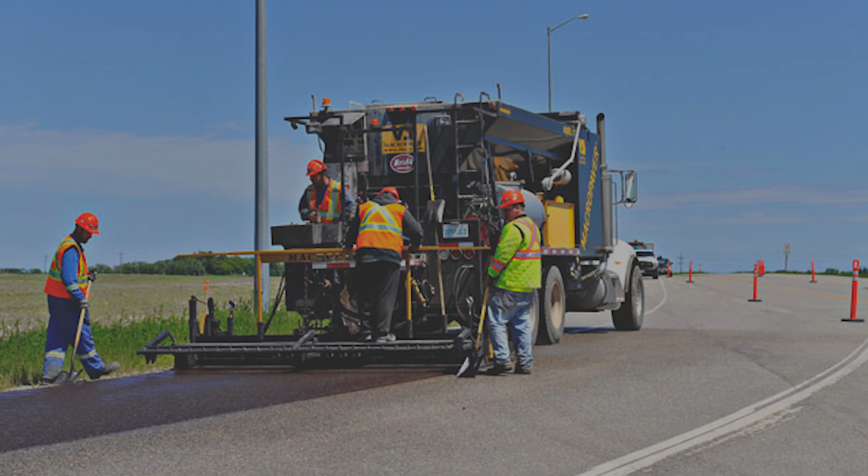A Sunday drive on a scenic highway, a rush hour on the way to work. Bridging gaps between communities and commerce has been the primary focus of roads in our day-to-day lives. What happens when the integrity of our roads begins to crack and crumble due to high-volume use, severe weather conditions, or simple lack of care?

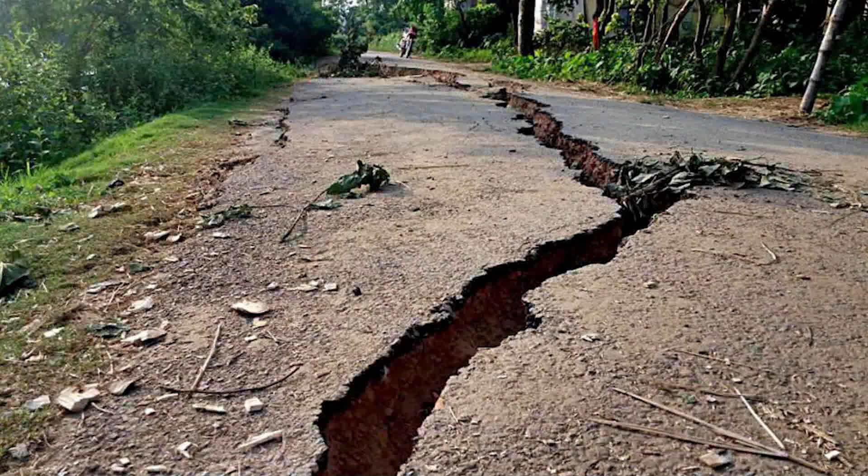It's important that long-term investments are nurtured to maintain the original state they were intended for. A quality solution for others to travel on that is safely engineered and preserved by professionals and the equipment they choose to use. Over time, a road surface becomes brittle and fragile, causing cracking, loss of friction, voids in roads, and ultimately hazardous conditions for drivers and their passengers.

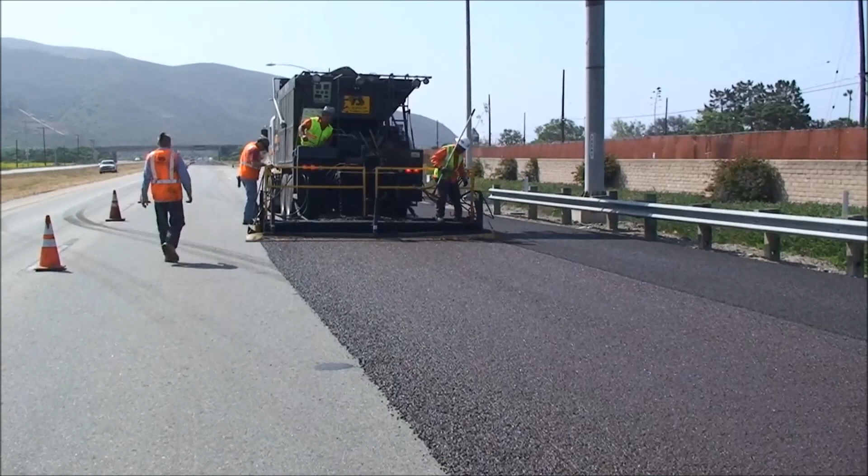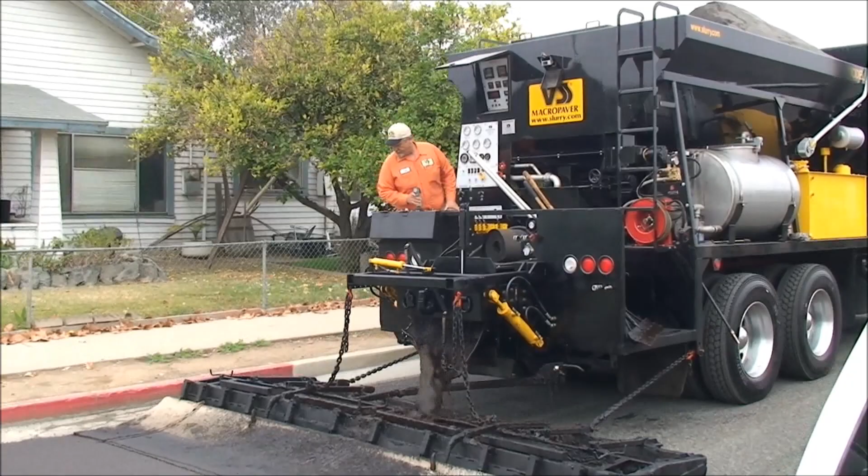Fortunately, there are solutions that are paving the way for construction specialists to identify weaknesses in roads and effectively solve problems through prevention before any heavy rehabilitation is required. It's important to choose the right solution for the right road. SLURRY and microsurfacing are top-quality, durable solutions available in road maintenance and preservation.

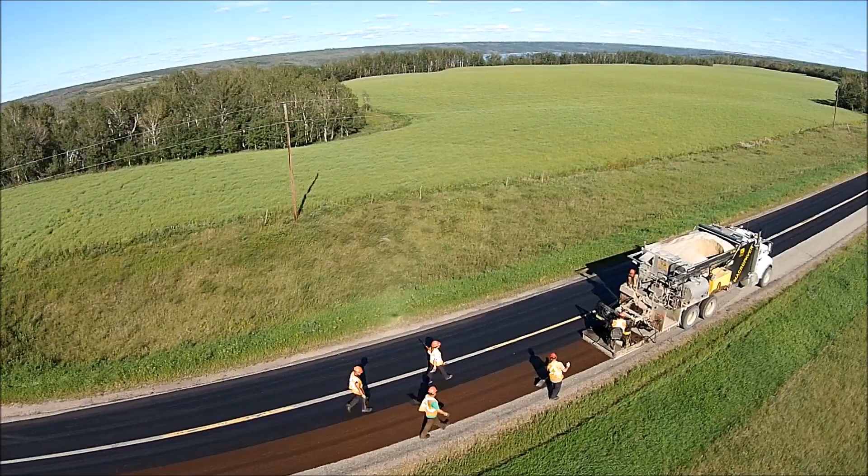Although SLURRY does not solve all issues that plague the roads we drive on, it is the most effective form of road maintenance. This prevents the financial consequence of doing too little to repair it or waiting too long to maintain it. So what is SLURRY? SLURRY is a combination of emulsified asphalt, fine aggregates, water, and additives that are precisely mixed together to spread over a prepared surface. With the capability to be applied in multiple layers, SLURRY can lengthen the life of existing pavement by providing a protective guard against oxidation, water and sun damage, and freezing temperatures.

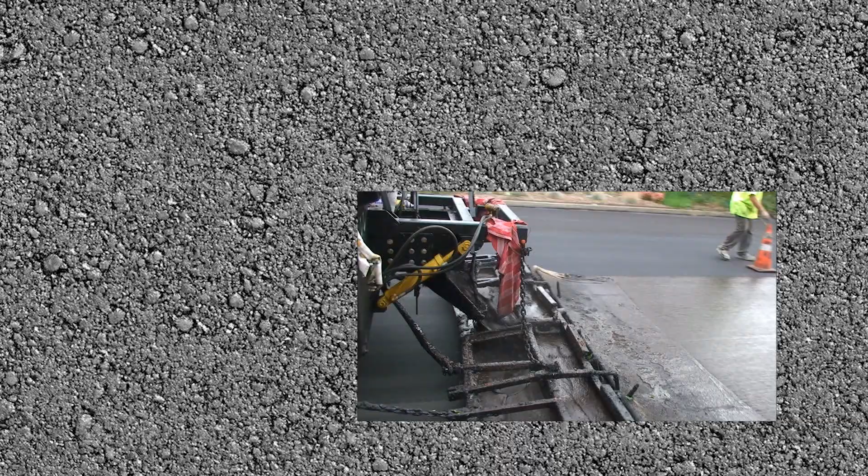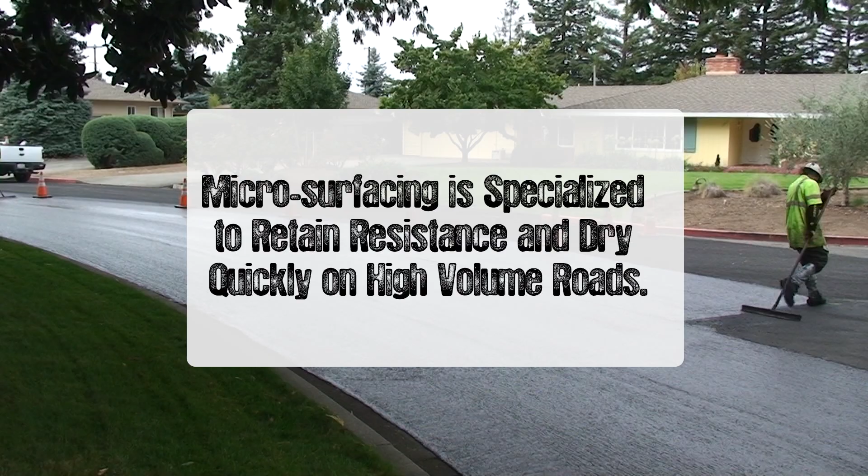What's the difference between SLURRY and microsurfacing? Microsurfacing is a specialized version of SLURRY. It is designed to retain skid resistance while prolonging the life of the road just as SLURRY is. Microsurfacing uses a polymer-modified emulsified asphalt, water, and additives with a faster setting time due to the chemical makeup. It is applied in thicker layers for high-volume roadways that need to dry quickly.

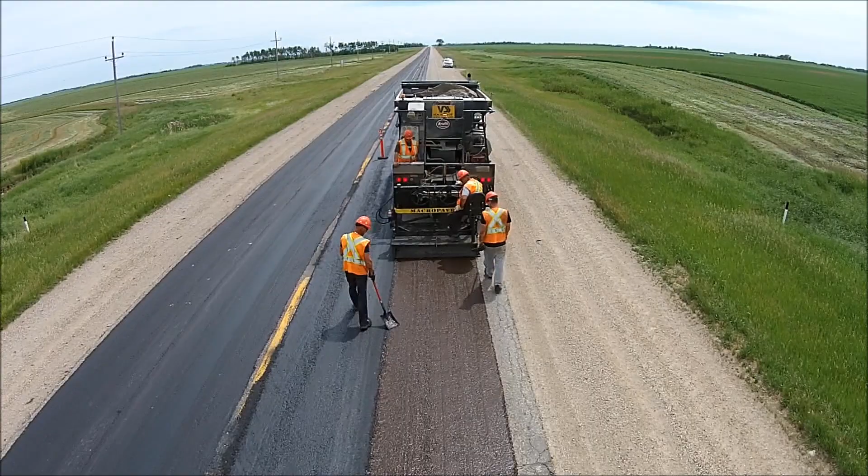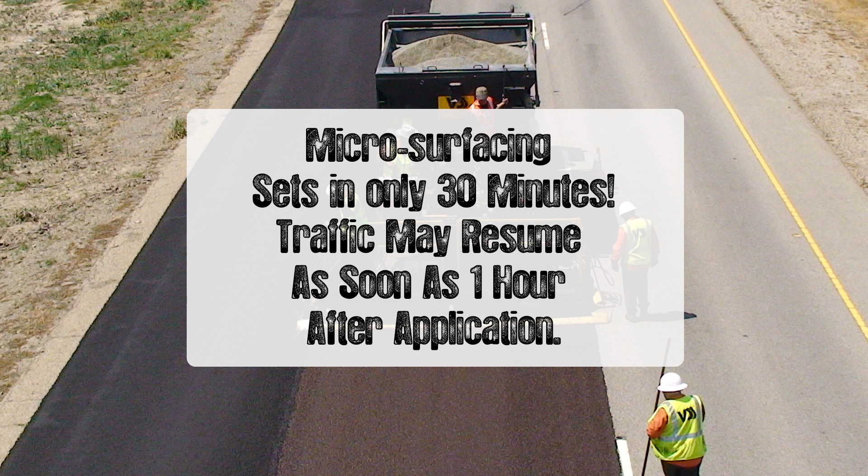Remarkably, microsurfacing can dry in 30 minutes, compared to a 2 to 5 hour set time for SLURRY. This ensures that traffic interruption is kept to a minimum, or can be done overnight. Cars can begin to drive on the surface 1 hour after it's been applied. It's that fast of a product.

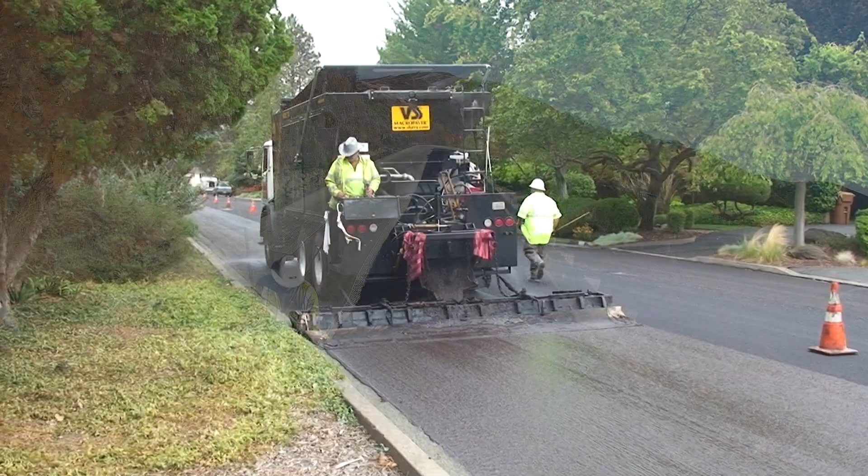It's important that SLURRY is applied to prepared surfaces. Roads showing the signs of damage need to be clear of imperfections that can affect the outcome of the quality of the project. Microsurfacing and SLURRY are applied to roads that are in good structural condition and have had failed areas repaired, cracks sealed, and roads swept of any debris that could prohibit the emulsion from sticking to the road.

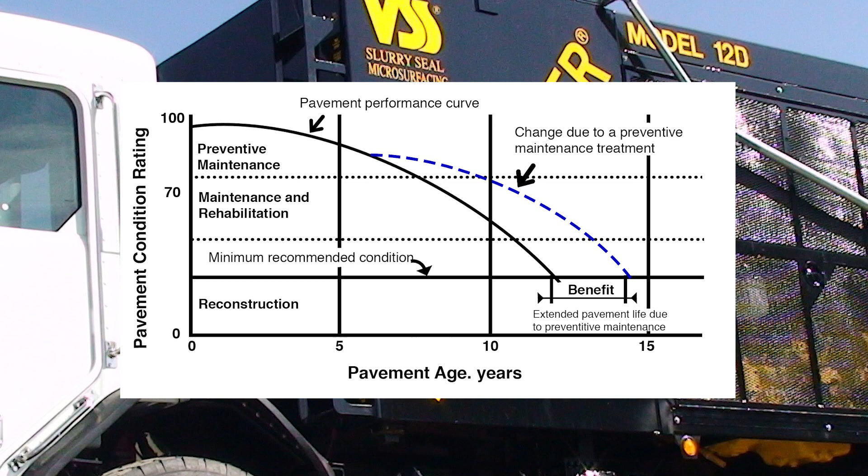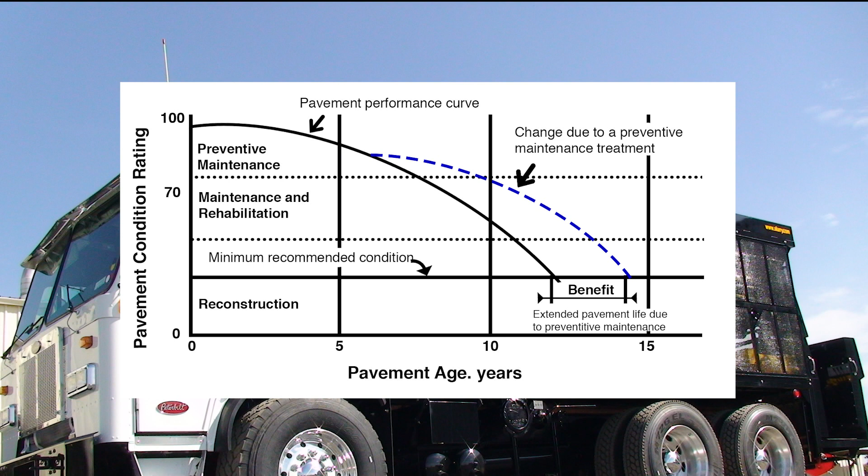SLURRY and microsurfacing benefits are clear. They are unique in their abilities to restore quality to old surfaces, prolong resistance to wear and tear, and increase overall friction on the roadways. This translates to longer-lasting investments and high-quality, safe roads with increased pavement performance.

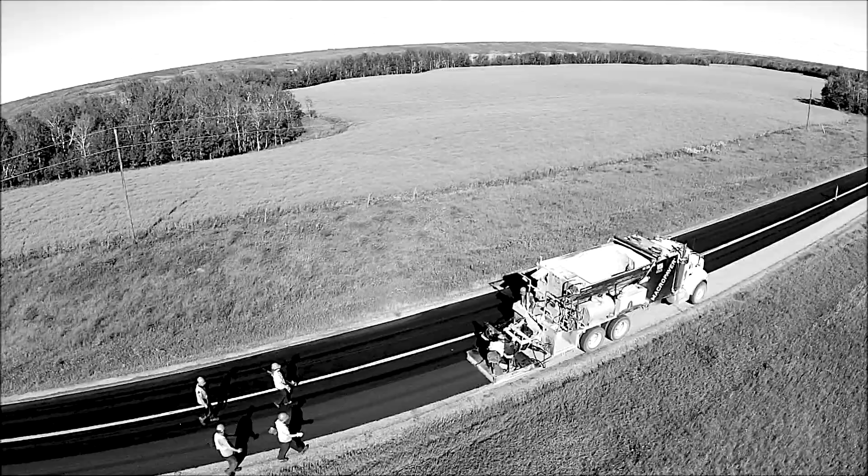Valley Slurry Seal Macropaver Division is an expert in the field of pavement maintenance. Whether it's equipment designing and development, technology and advancement, or training on equipment purchases, VSS Macropaver is a leader in the industry. Collectively combining forces with leading asphalt and emulsion technologies, VSS Macropaver is the single solution for all pavement maintenance and equipment solutions, specializing in SLURRY and microsurfacing needs.

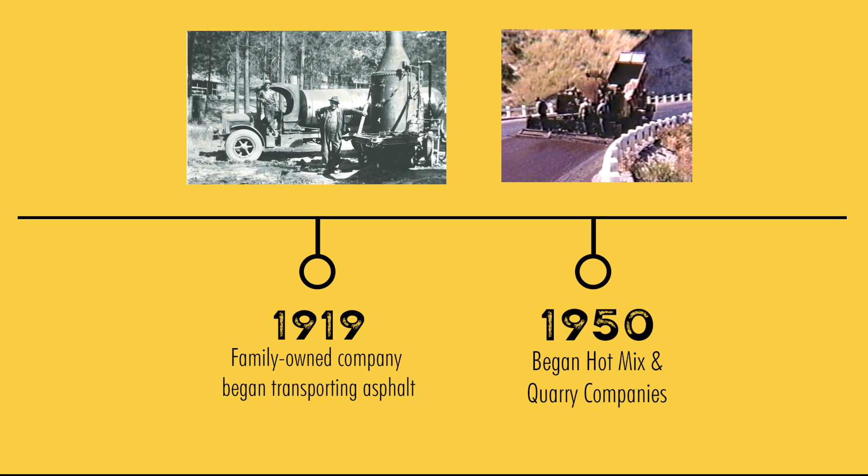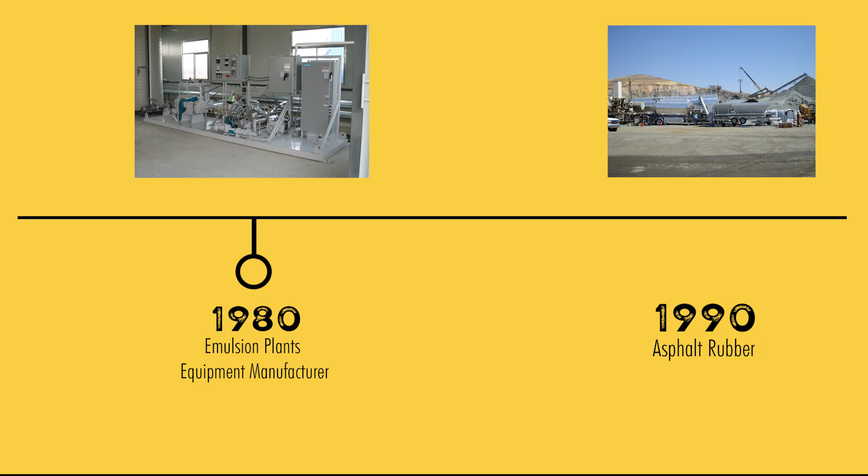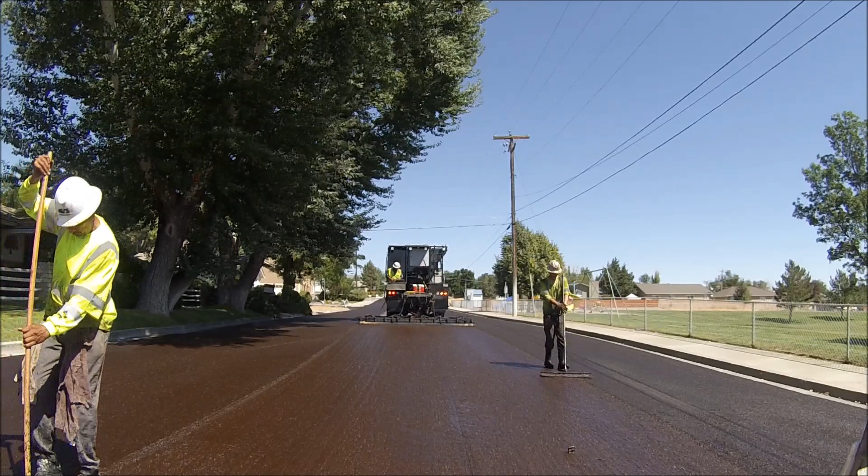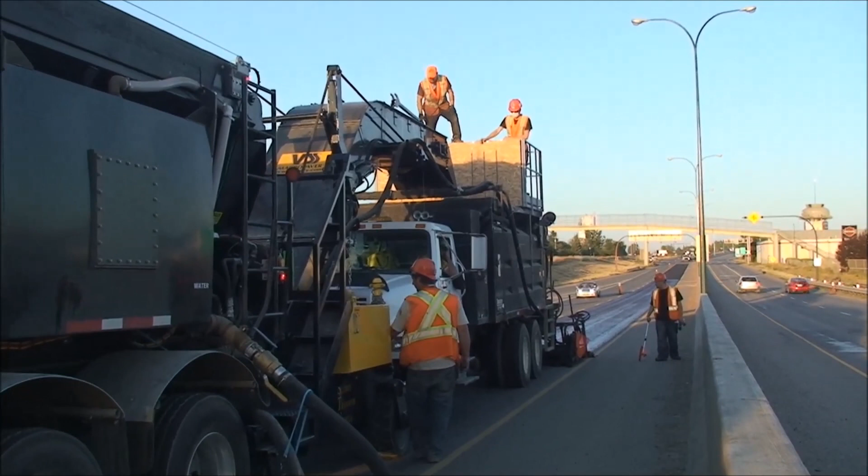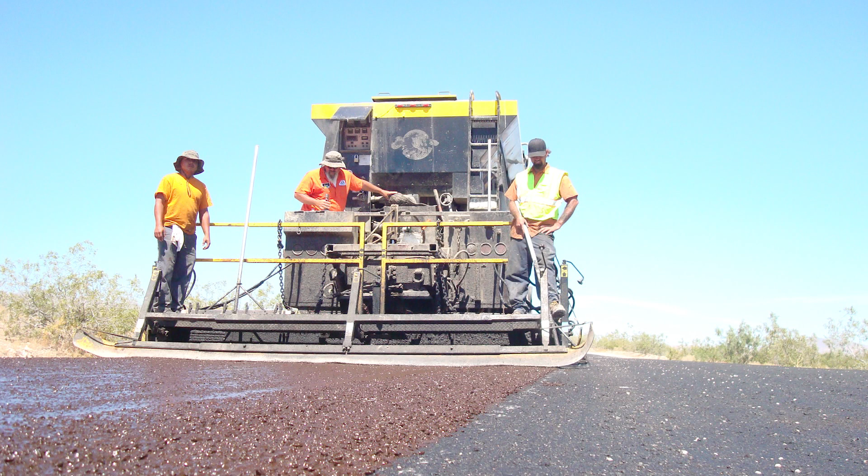From a construction standpoint, VSS had difficulty finding equipment that satisfied its need for quality, durable, superior equipment in road maintenance. Thus, the Equipment Manufacturing Division was implemented as a solution. Then the Macropaver Division, now VSS Macropaver, was conceived and has become an international asphalt maintenance equipment provider. VSS Macropaver takes pride in the moments that have built our business and have encouraged our vision for the future.

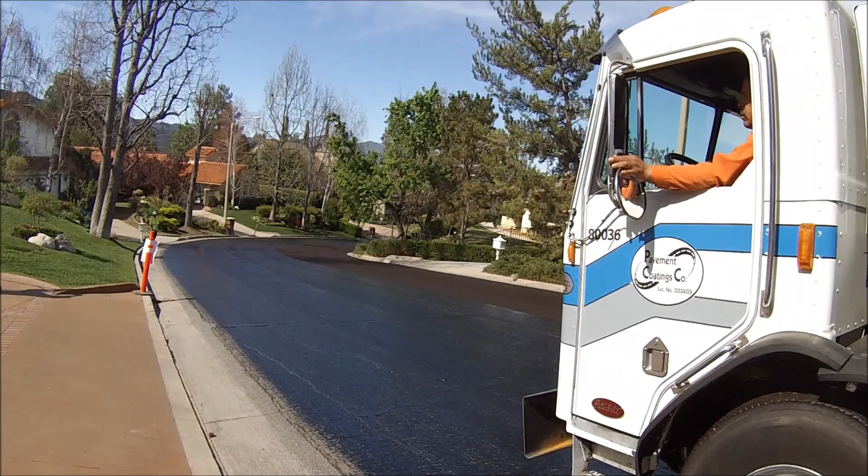Currently, VSS Macropaver prides itself in its signature products that have earned us world-renowned respect. With high-quality components and custom options available, let's take a more in-depth look into all that VSS has to offer. The VSS Macropaver 12B is the fastest slurry machine available on the market, with average application rates that reach up to 4 tons per minute. The Macropaver 12B can effortlessly complete double the amount of work within normal time constraints.

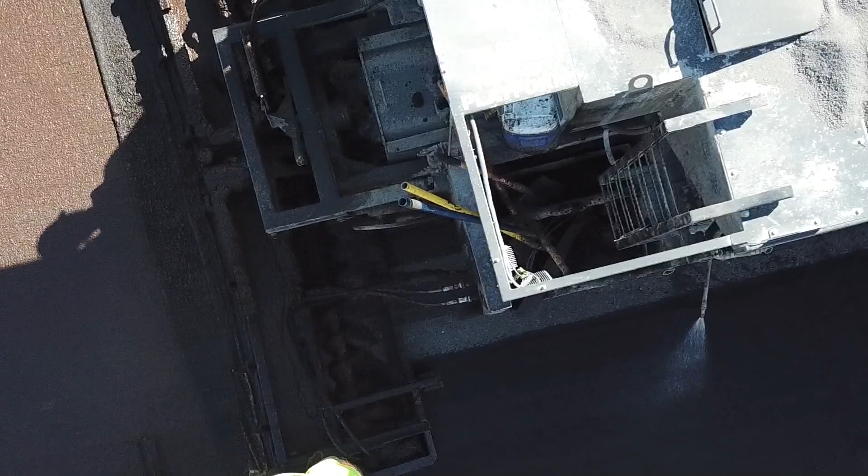American Asphalt has been in business for 22 years. I started this part of the business with American Asphalt in 2001, and our first machines were Macropavers. We bought 3 at that point, and we're very happy with them. We have 2 more. We have a total of 5. We feel that their production is very good, and we have not very many breakdowns at all. That's what we like about them, is they're good production machines, and we just don't have any problems with them. 2 Macropavers with a 7-man crew can output 30 to 35,000 square yards of slurry or microsurfacing through continuous swapping of machines on a production site in 6 hours.

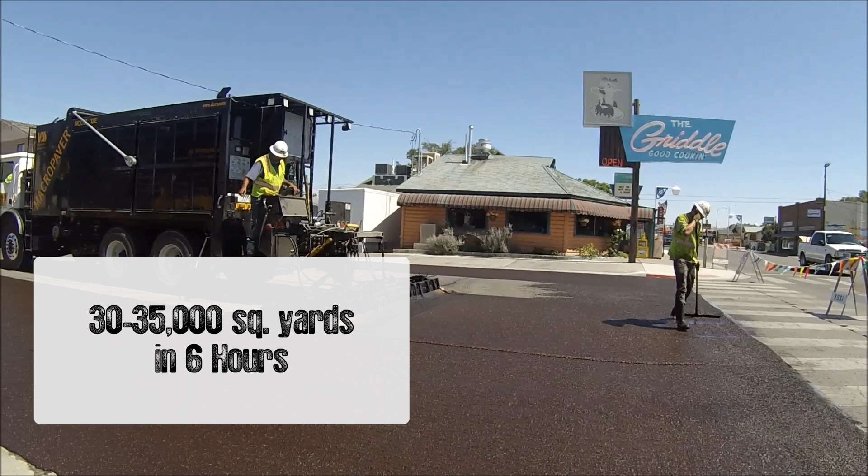When one Macropaver has completed its load, the next is right behind it, continuing where it left off, allowing the first Macropaver to reload and take its place. In the paving industry, the Macropaver is capable of covering more ground in a shortened season.

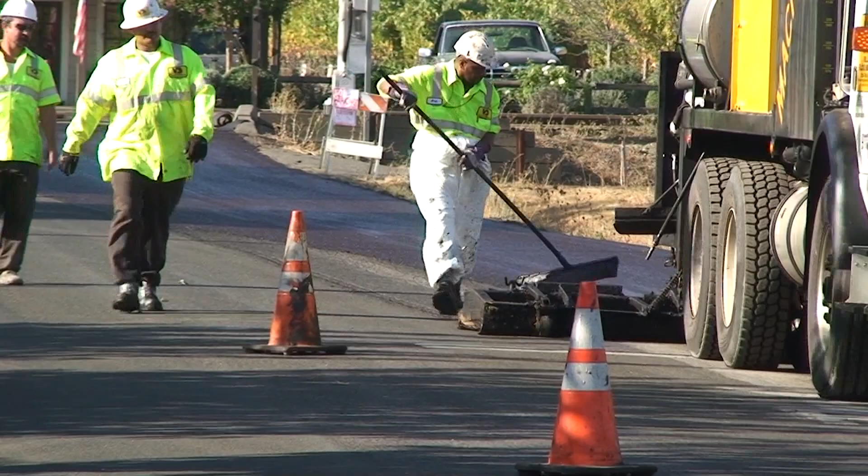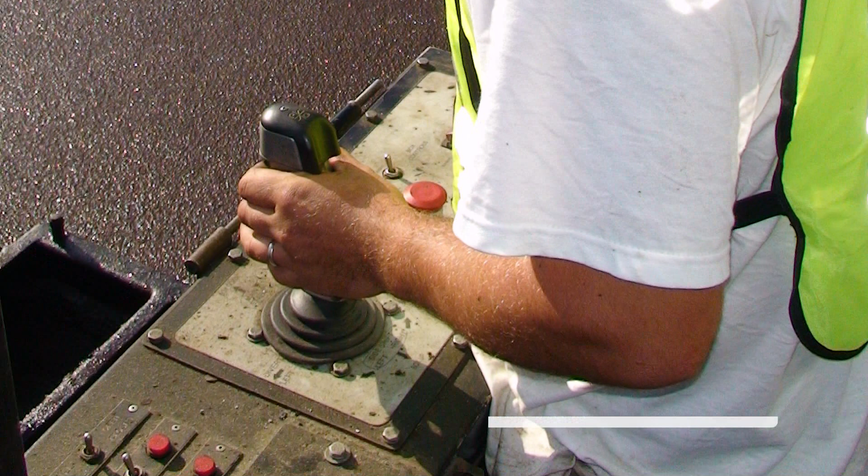The VSS Macropaver has a variety of features that all infuse together to ensure ease of operation. VSS pioneered automatic sequencing and is enabled with one touch from the operator's joystick, releasing and mixing the required solutions of aggregate, water, emulsion, and additives into the pug mill. Through constant monitoring at any delivery speed, a consistent pavement quality is achieved.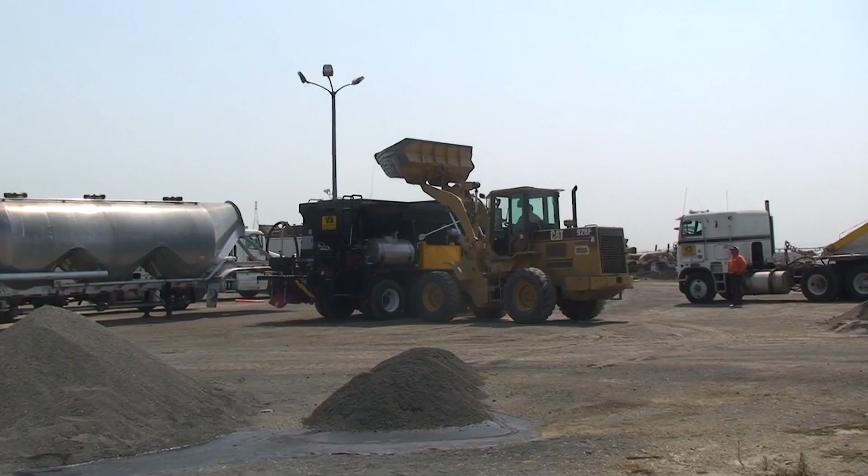High productivity, ease of use, and overall reliability are distinct benefits to owning a Macropaver. VSS Macropaver has an understanding and insight that only 50 years in the industry can provide. All equipment is manufactured and designed with real-life application as our gauge.

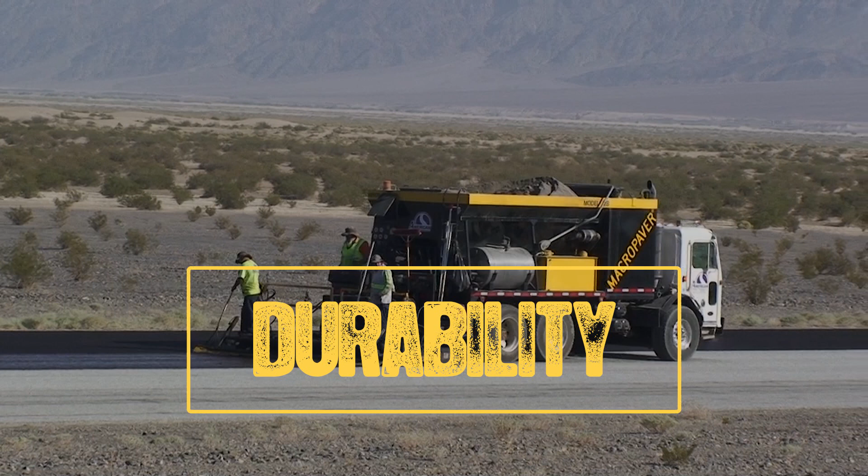We listen to our customers' feedback as a means to identify opportunities in our machine's development. As a contractor, VSS uses their own machines to ensure the delivery of top-of-the-line durability that makes sense from the operator's perspective. All items are field tested and customer approved.

VSS Macropaver offers a variety of custom manufactured solutions for batch or semi-continuous emulsion production plants. Have you ever tried to put a puzzle together and you realized when you were finished that you were missing pieces that made it all make sense? VSS will put it all together for you, focusing on your business's unique need with custom plant solutions.

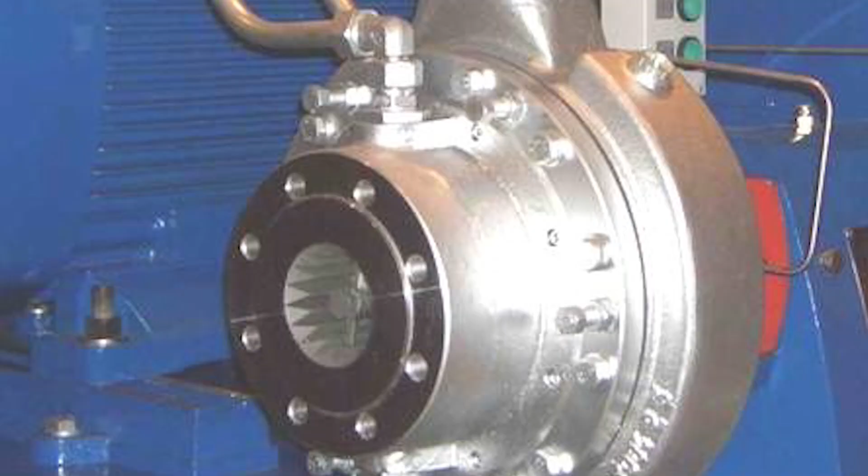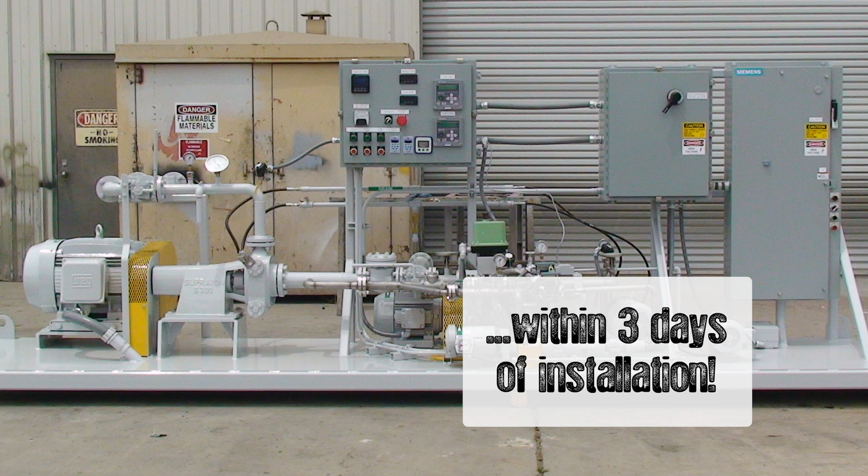Each VSS emulsion plant is ready for use and available in a variety of layouts, with an array of skid-mounted mill packages to select from. You can become equipped to meet numerous production requirements. Producing anionic or cationic quality emulsion using a colloid mill, VSS emulsion plants enable a new business to start quickly and easily. VSS manufactures some of the simplest plants available. Within 3 days after installation is completed, you will be operating and running your own customized emulsion plant.

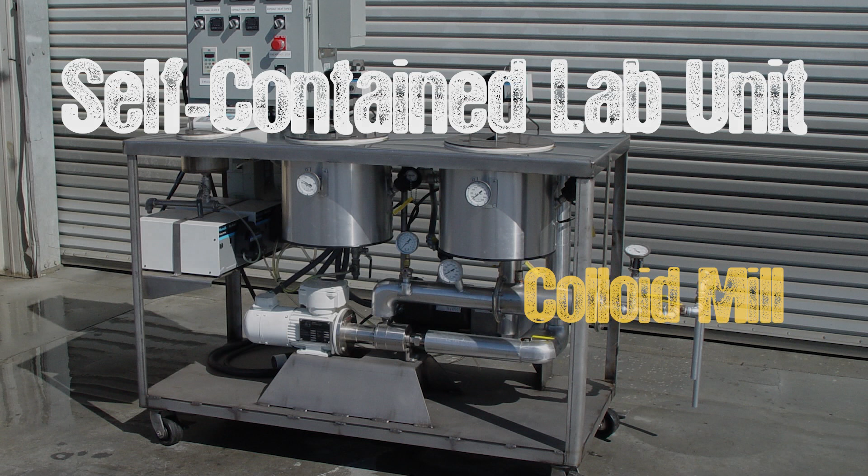VSS also has laboratory emulsion mill plants, a self-contained unit made up of a heavy-duty steel cart with locking casters. The lab mill uses a colloid mill with a stainless steel rotor and stator to match the production-sized emulsion plants. Lab mills are used as a pilot or testing method for your emulsion formulations, but on a smaller scale.

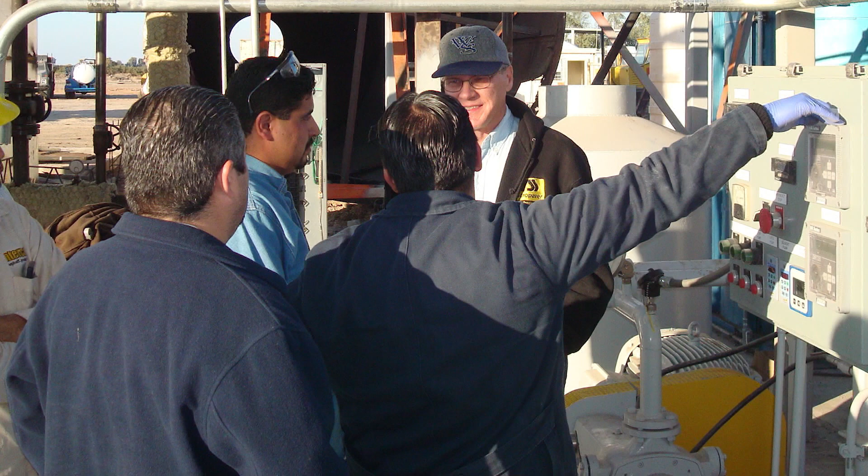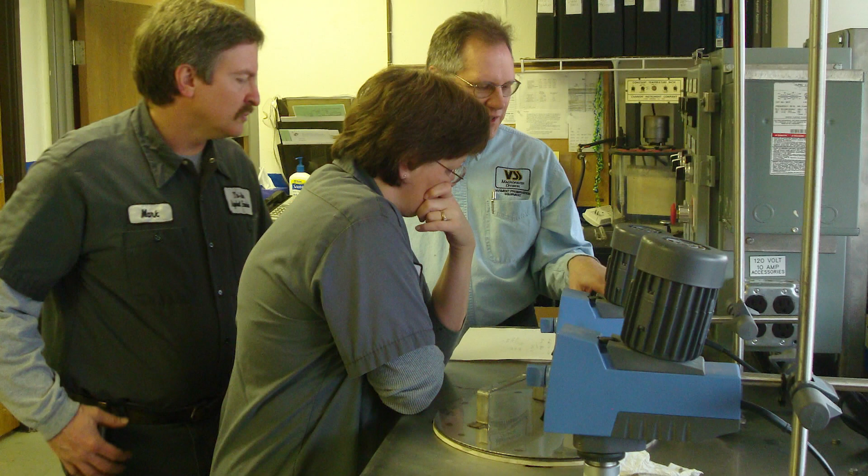The best feature of the VSS emulsion plant is the personal consultation customers receive through the entire process. With expertise in asphalt, binders, and emulsifiers, VSS is capable of creating quality emulsions with raw materials provided by our customers. Whether it's to produce your own emulsion for quality or quantity purposes, VSS has a custom solution for our customers' individual needs.

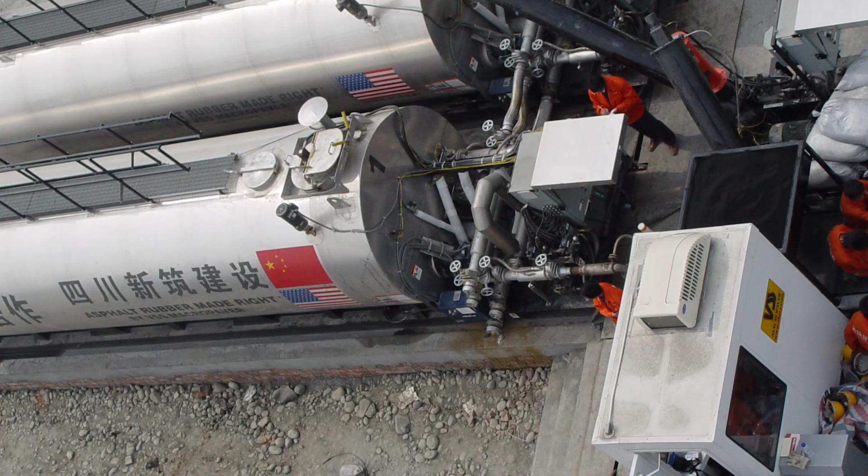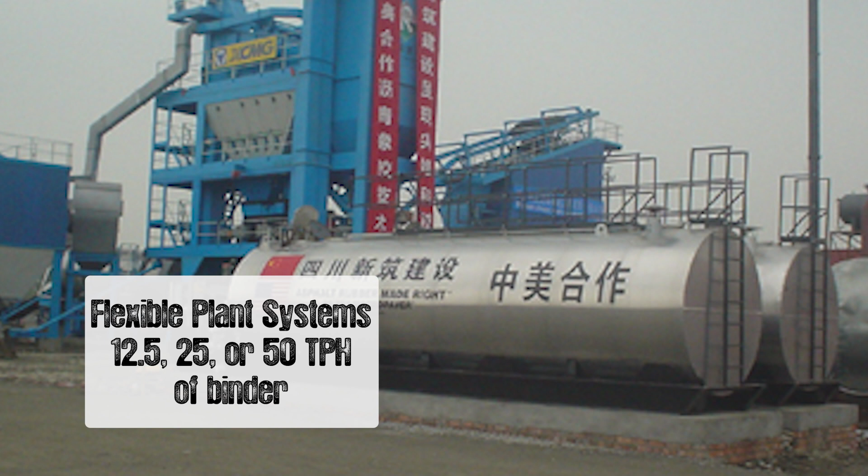Using 30 years of experience in the field, VSS builds and markets asphalt rubber and polymer asphalt blending equipment. The beauty of the asphalt rubber blending system is its ability to be configured to produce 12.5, 25, or 50 TPH, tons per hour, of binder. If you start at 12.5, the AR system is capable of being scaled up with additional units to increase production, based on the needs of your business.

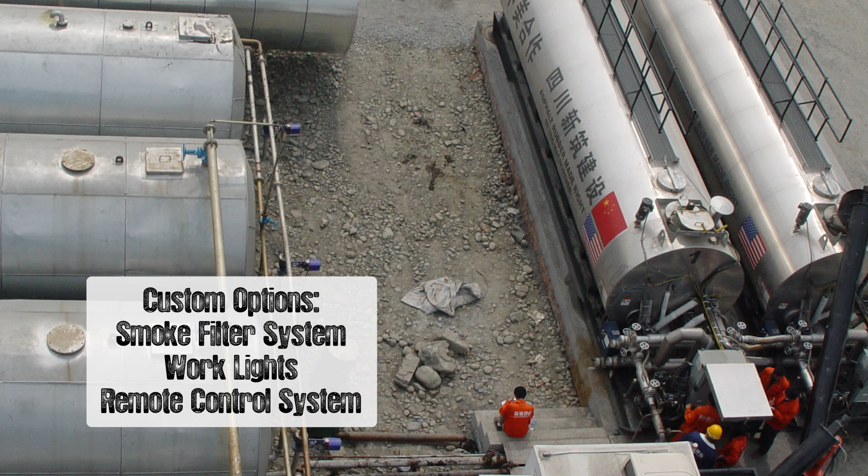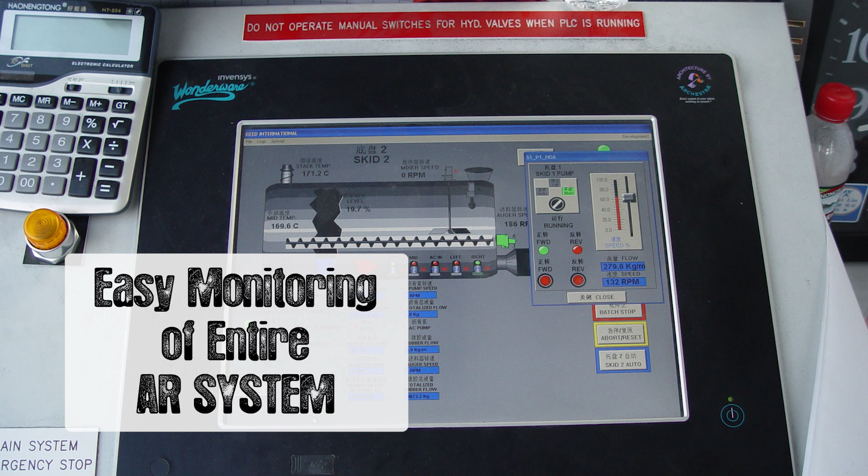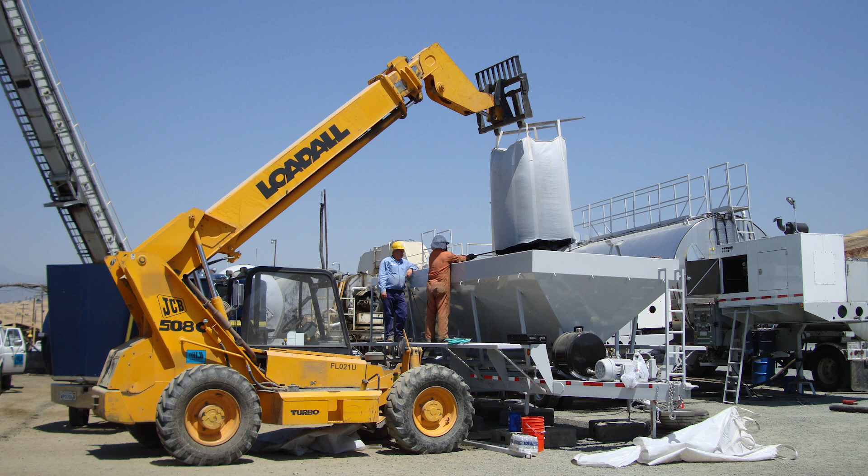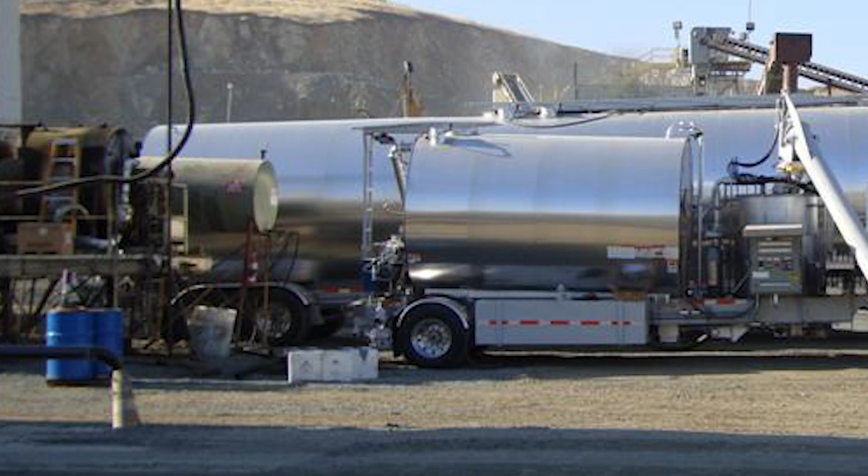Implementing the same simple yet state-of-the-art design VSS is renowned for, the asphalt rubber blending system does not require any additional labor to perform at a higher production rate. VSS also offers a mobile solution for asphalt rubber blending systems. This is literally where the rubber meets the road. With patented technologies, VSS asphalt rubber blending systems are engineered for high mobility to reduce time and the expense of mobilization. This top-of-the-line mobile solution allows for the freedom to move from one job site to another with ease.

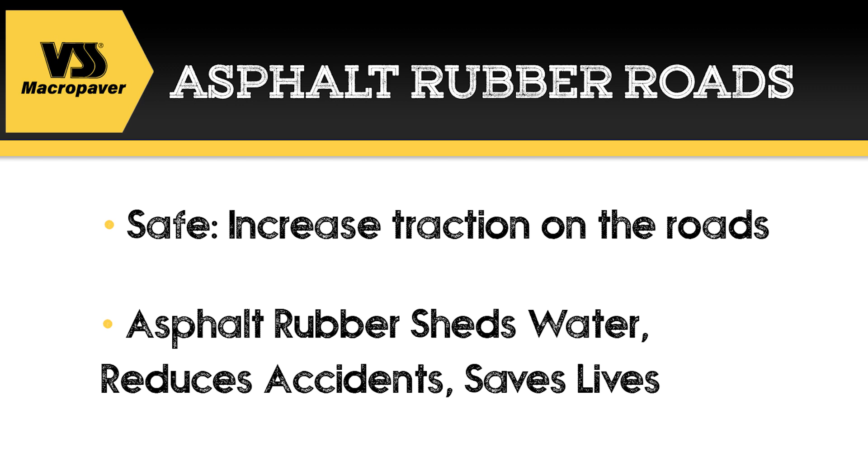Asphalt rubber roads are safe. Asphalt rubber has the ability to increase the traction on the roads, shed water, reduce accidents, and save lives, reduce noise, increase durability of the pavement, and is a viable means to recycling scrap tires. Recycling our waste is one way our industry can take care of our business while being conscious of the environment.

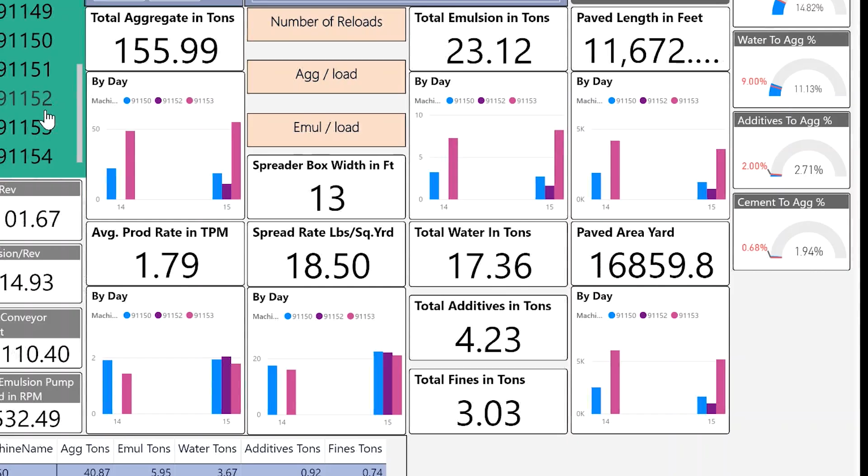I'm Doug Hogue, Vice President General Manager of VSS Macropaver. I'm here today to tell you about our exciting new system, our telematics system for remote reporting of project information. We developed our telematics system to improve the efficiency of construction. This system provides project information in real time over the cloud to your computer, phone, or tablet.

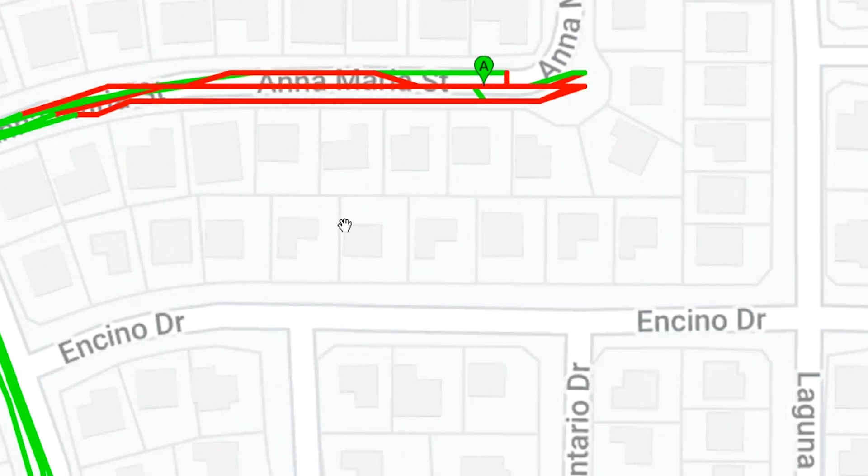The Macropaver pushes the material production information along with GPS location up to the cloud using wireless cellular technology. It will even store the information and automatically send it if there is a loss in connectivity. Using our cloud portal, the project manager can set up the calibration information, the machines used on a project, and generate daily reports showing material usage and spread rate for the team of machines or an individual machine on a project.

This saves time and allows for reporting without interruption to the crew or project. My name is John James. I'm the operations manager here at VSS International. My duties are I run 7 slurry/micro crews and a couple chip seal crews, along with crack sealing and some other miscellaneous stuff that we do here.

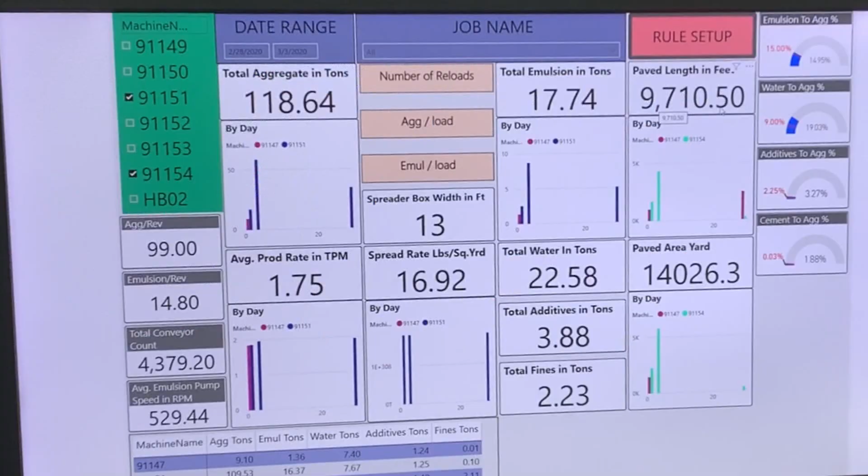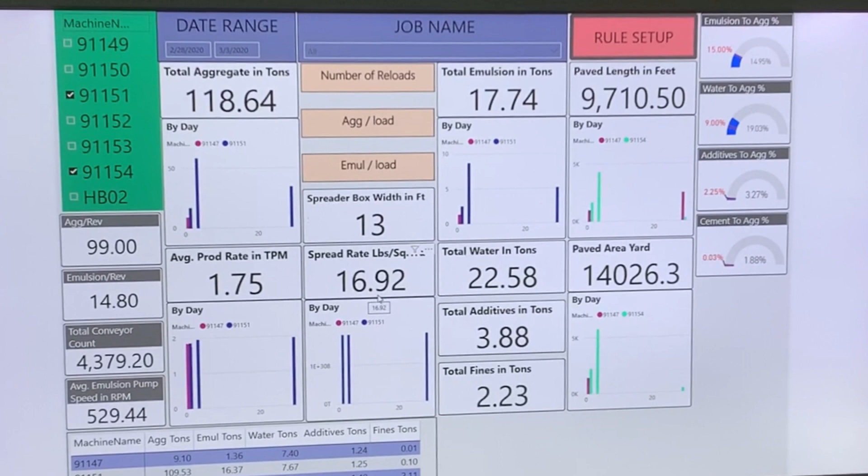Here we got the telematics pulled up on the screen, and I currently have 3 trucks in Lake Mead: 91147, 91151, and 91154. So we got it pulled up right here. We're looking at 91154 total tons right now. We got 118.64 tons of aggregate laid down on the ground versus 17.74 tons of emulsion. And we paved

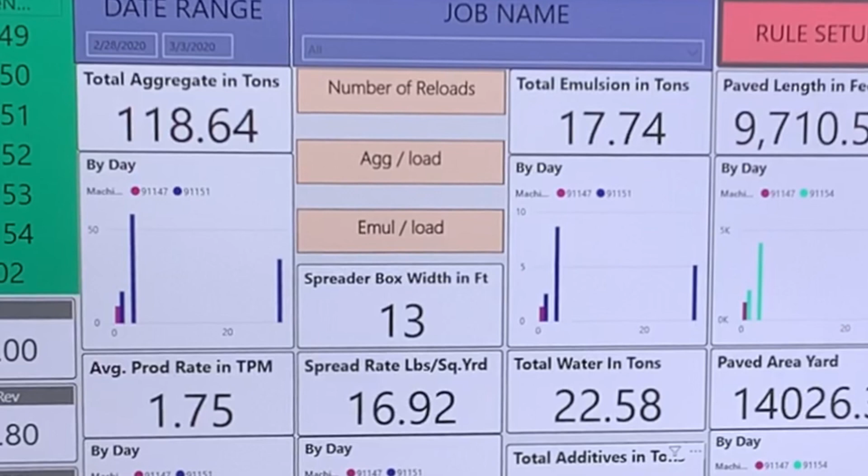9,710.50 feet there. Hi, my name is Matt Ferguson. I'm the construction manager for VSS International. We complete over 100 projects a year in 6 western states. We use Macropaver truck mounts for all of our slurry and microsurfacing projects.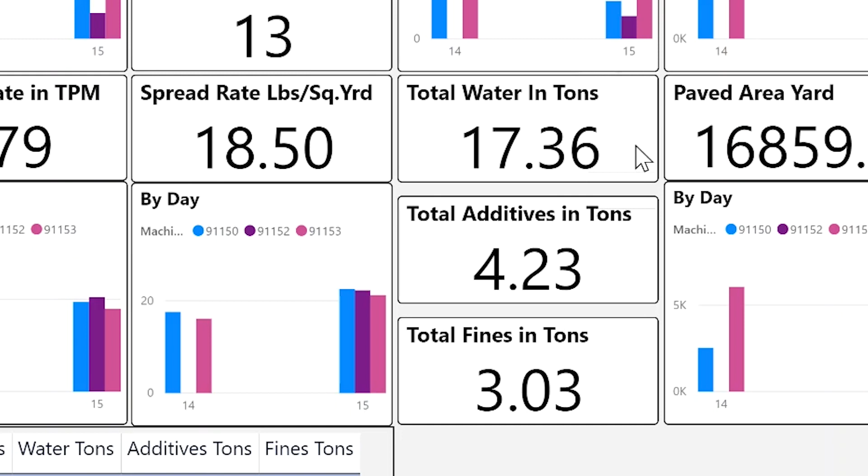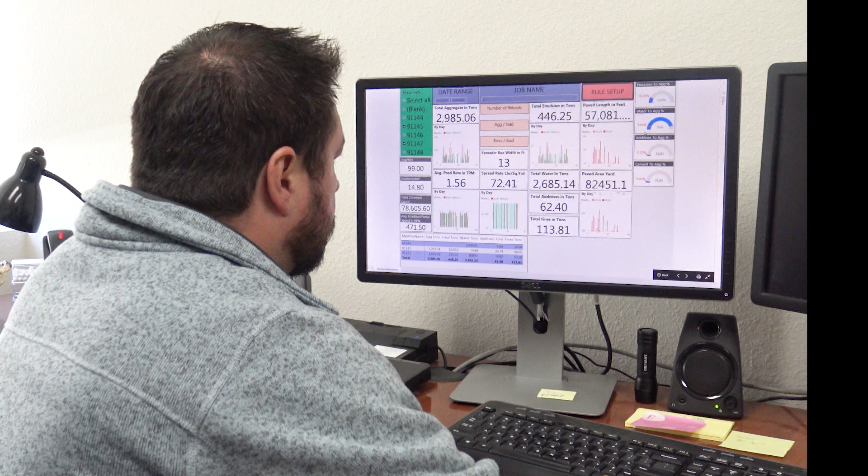Well, there's a lot of useful functions with these types of dashboards. The total aggregate tons coming out of your paver is important. The square yards that our Macropavers are placing. It gives us a real-time snapshot of what the crew's doing in the field. We're able to check in with our superintendents to make sure we're hitting the right spread rates and abiding by our mix designs.

VSS Macropaver is proud to introduce another major breakthrough in road maintenance products, the STV, or Slurry Transfer Vehicle. Start bidding continuous projects with your truck-mounted slurry machines, capable of loading up to 8 tons per minute of aggregate and up to 200 gallons per minute of water and emulsion, continuously, while applying slurry or microsurfacing, means high production, with no pavement joints from starting and stopping. And if the job has cul-de-sacs or lateral streets off the main streets or roads, simply disconnect the STV and use your truck mount to quickly access these areas.

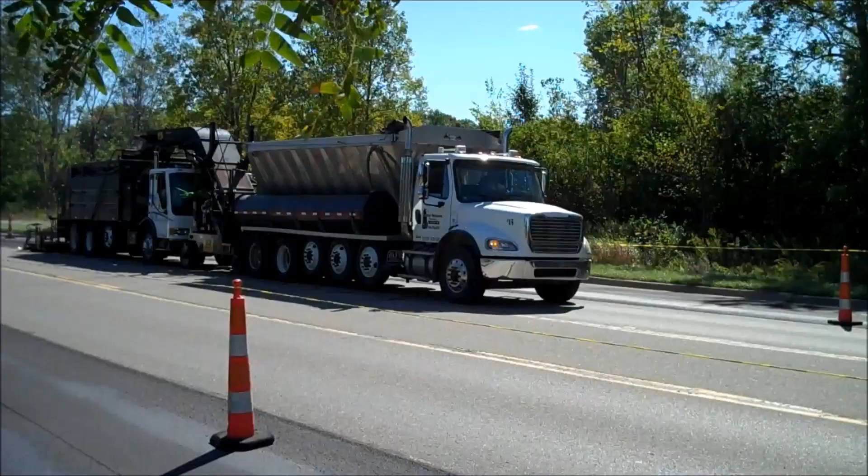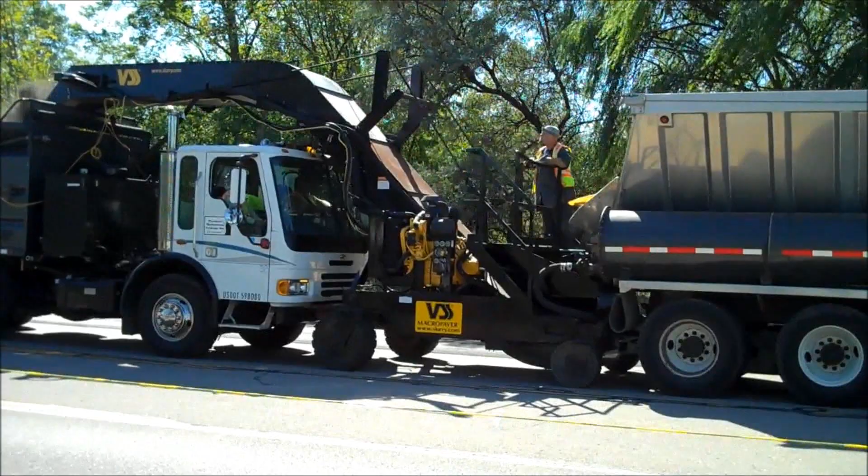The STV is designed to work with all major brands of truck-mounted slurry machines. Only minor fit-up modifications are required. A robust hitch receiver tube is mounted to the front bumper or truck frame of the slurry machine. Hydraulically actuated pins on the STV engage into this tube to securely connect the STV to the slurry truck. Safety latches and a breakaway interlock are also part of the truck hitch design.

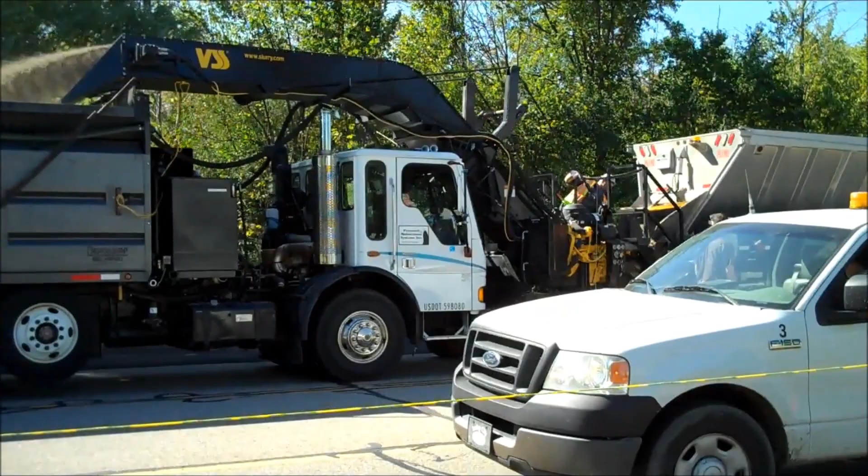Connecting to your nurse units is accomplished on the move. Simply pull up to the nurse unit, latch onto it with the STV hitch, and connect the water and emulsion hoses. Various nurse unit hitch designs are available. The STV uses a turbocharged 64 horsepower diesel engine, with engine speed controlled by the electronic controller. The engine is mounted on the opposite side of the STV from the truck driver to reduce noise.

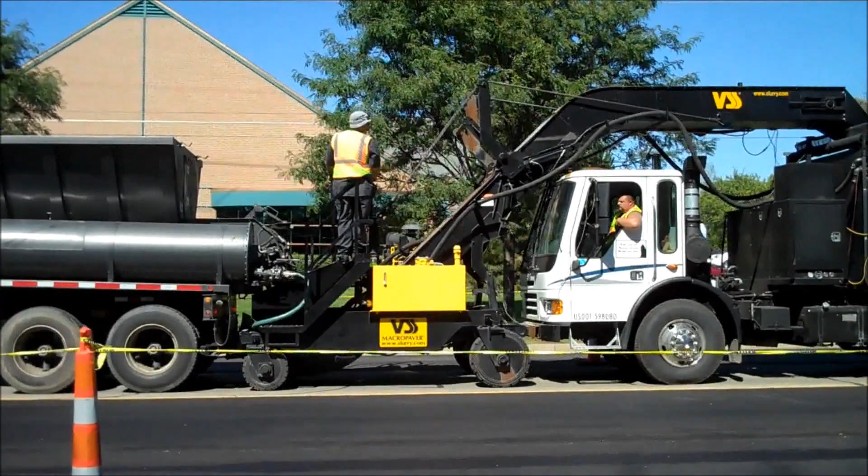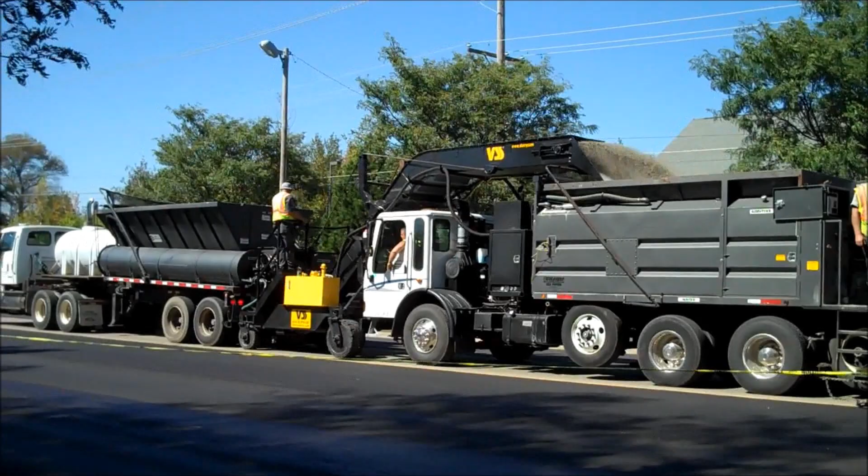The STV utilizes a CAN bus electronic control system. The operator display control panel can be mounted in the truck cab for use by the truck driver, or mounted to the catwalk on the STV for use by the hookman. The controller is tied into sensors added to the slurry machine's water and emulsion tanks to automatically maintain proper tank levels. Aggregate, water and emulsion flow rates are easily controlled by the operator to match the production requirements of the slurry operation. The electronic controller also provides various interlocks, such as setting the brakes when folding or unfolding the conveyor.

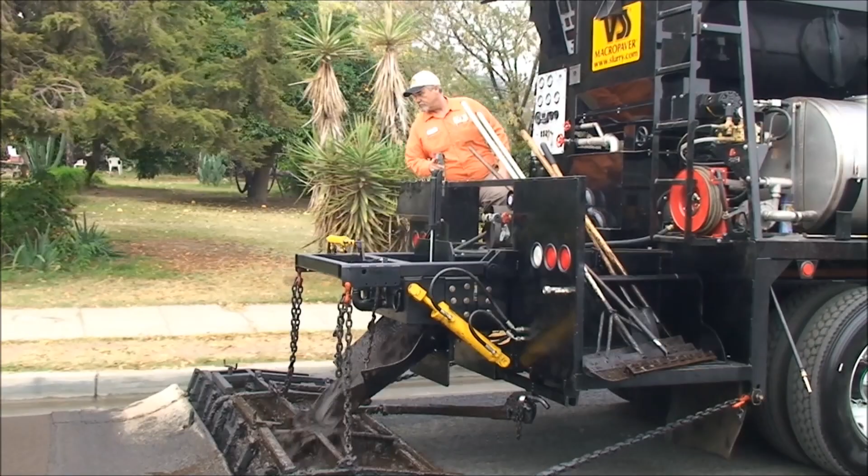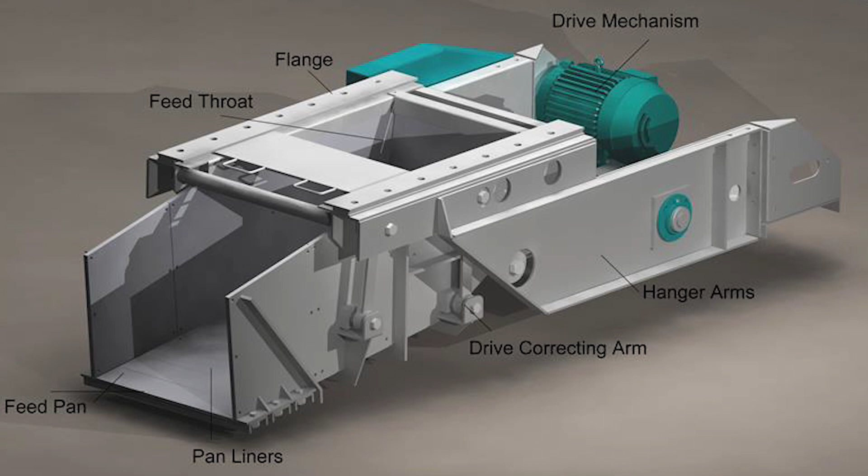VSS Macropaver offers the full line of Noble aggregate feeders. These feeders are equipped with abrasion-resistant liners that are long-lasting and resist buildup of sticky materials. A variety of sizes are available, with capacities ranging from 450 to over 2,400 tons per hour. Eccentric drives create a reciprocating pan movement for positive displacement material flow. Noble feeders allow precise control of material flow rates by controlling the speed of the pan.

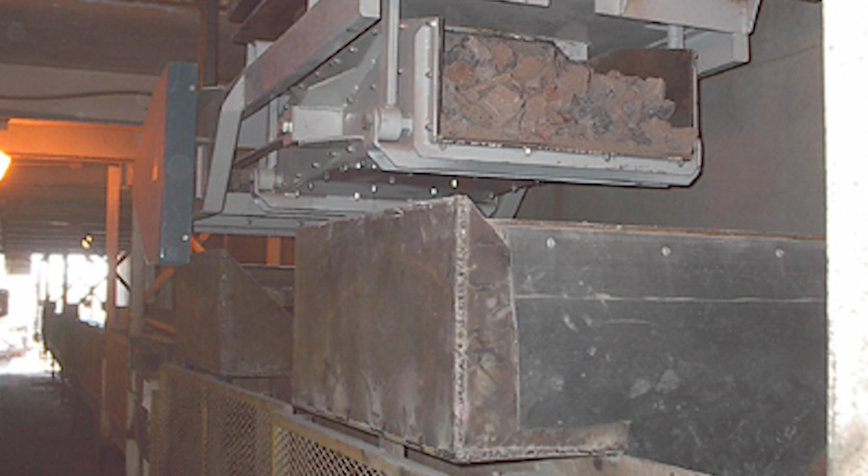The unique dual flow design allows more material to flow through a lower profile feeder, making them ideal for tunnels and other applications where headspace is limited. Easily double your capacity by retrofitting an existing tunnel with dual flow feeders. The single flow feeders have a deeper pan that can handle larger lump sizes and raw pit material. The deeper pan also provides a shorter drop to the conveyor, minimizing belt wear. The Noble feeders are rugged, durable, long-lasting, and require minimal maintenance.

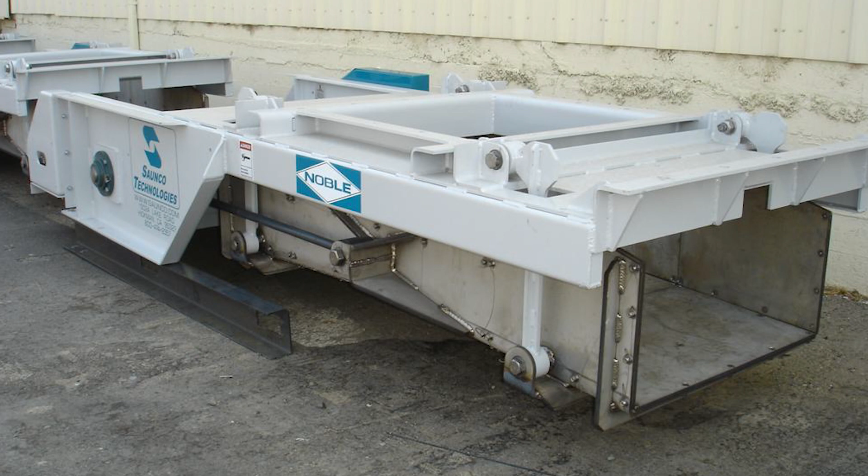VSS prides itself on building substantial relationships that turn into long-lasting friendships. We take care of our customers by providing them personal attention and great, reliable equipment. The facts are simple. Our customers like our machines, and we like our customers. With that winning combination, we have established our company as an international forerunner in the slurry industry.